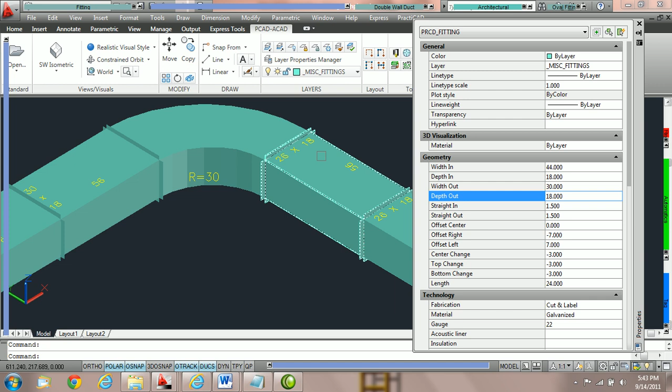However, if you would like the ability for the edit to go through the elbow and carry down the duct line up until the next fitting, we can choose to do so in our Ductwork Options. We're going to choose this option by going into the library icon on the PractiCAD ribbon or Express toolbar. Then we're going to go over to the Ductwork Options section by clicking on Ductwork.

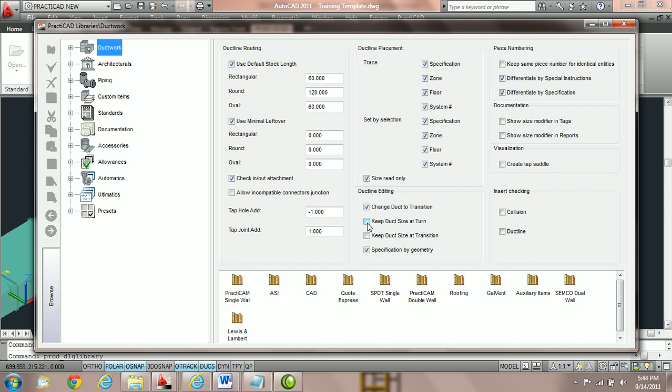Here you can see that under duct line editing we have an option that says Keep Duct Size at Turn. Currently it's unchecked, which is why the change only went up to the elbow and didn't carry through the elbow. Now we're going to check it, hit the save icon, and then we're going to exit out of the library. Now what we're going to do is go back to the transition.

We're going to double click and we're now going to take the width out and make it 34 and hit enter. Notice that this time PractiCAD has carried the change all the way down the duct line through the elbow to the end of the duct line or up until the next fitting. So we have 34 by 18 on both sides. It carries the change all the way through the duct line.

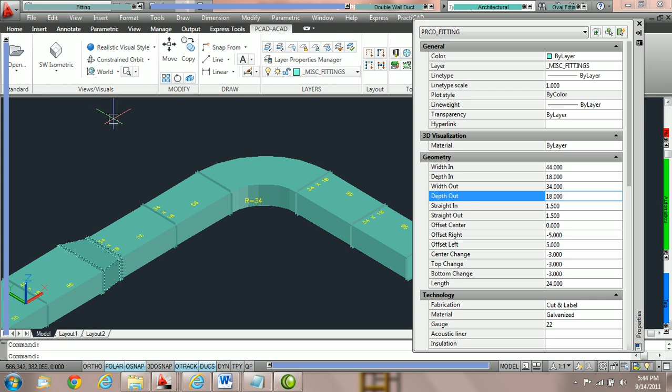Now Keep Duct Size at Turn also has another feature. It's got a dual function inside PractiCAD. To demonstrate, what we're going to do is we're going to grab a piece of pipe in the system and we're going to set it at 12 inches in diameter. And then we're going to place it on the drawing.

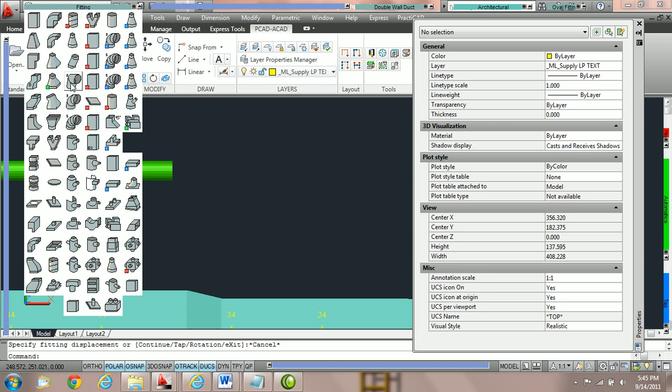If we are working on continue and we're going to grab an elbow, a 3-gore elbow, and we're going to hit C spacebar for continue, you can see that when we do that, PractiCAD has resized the connector out or the diameter out of this fitting to match the diameter in of the fitting.

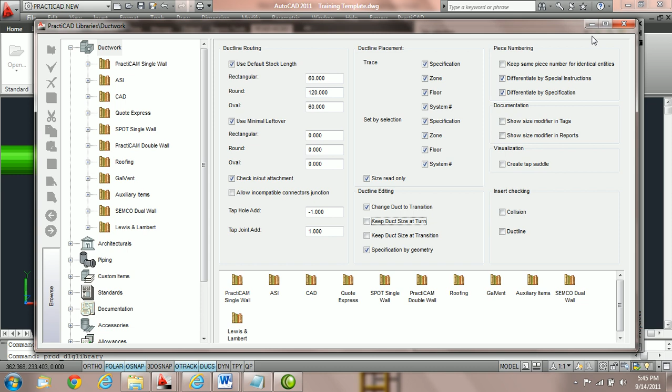However, if we uncheck that option in library, we will not get PractiCAD to resize the out to match the in. For example, we're going to uncheck Keep Duct Size at Turn. We're going to hit the save key and then we're going to exit out. Once again, we're going to grab a 5-gore elbow, and notice that when we go to grab the 5-gore elbow, it only resizes the diameter of the in portion of the elbow and not the out.

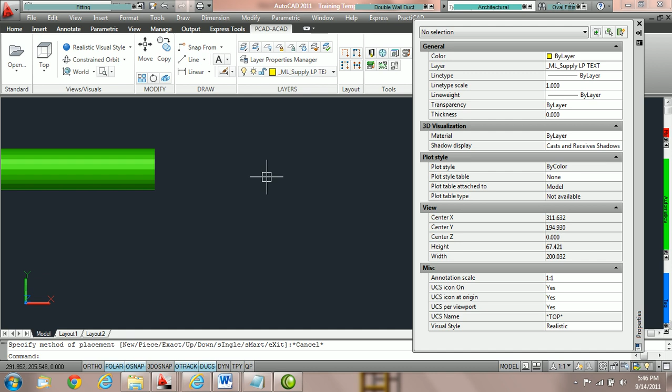So Keep Duct Size at Turn will have two functions. One, it will always resize the out parameters to match the in parameters so you don't have to change them on input. And it will also allow it so that if you make an edit up or down the duct line, that edit will carry through the elbow instead of up to the elbow.